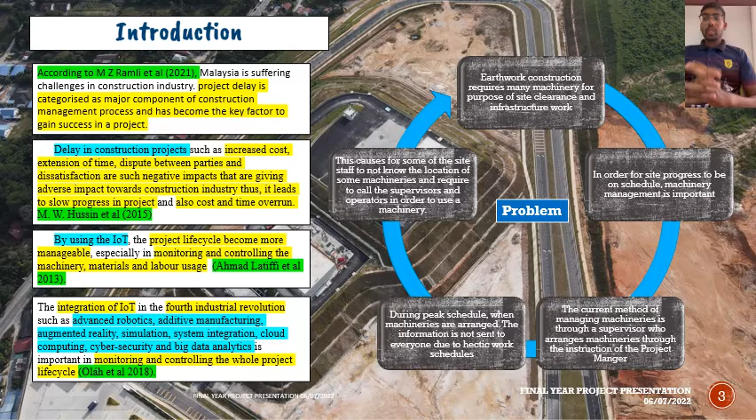The current method of managing machineries is through a supervisor who arranges them through the instruction of the project manager. During peak work schedule, when machineries are arranged, the information is not sent to everyone due to a hectic work schedule, as everyone is busy with their own work.

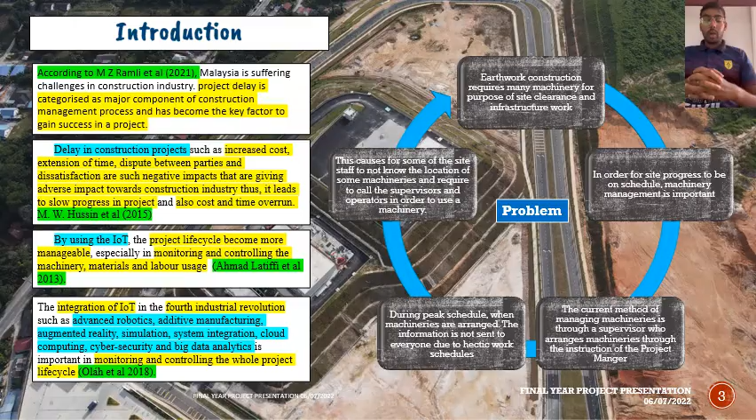Next, I'll be speaking about the problem statement. I have identified 3 previous researches somewhat similar to machinery tracking, but not the same.

The 3 researchers that I found use RFID technique, mobile computing device and wireless technology, as well as Internet of Things, to track items of their choice.

What I found is that the issue with RFID trackers is that they use a certain form of sensors, which provide issues as time passes due to wear and tear. To install sensors in heavy machinery such as trucks, excavators and bulldozers, the sensors are definitely subject to wear and tear due to the sophistication of the device and the way they work.

Next is real-time tracking. In one of the previous studies by Amine, they used real-time tracking to track construction work progress. This real-time tracking solution is dependent on GPS positioning, which does not work or function steadily during bad weather conditions.

Even our normal phone line is somewhat similar - we don't get good reception when the weather is bad, so the same concept applies here. In my application, I provide the location of machineries based on a site layout. I do not do real-time tracking or use sensors, and I also provide details of the operators.

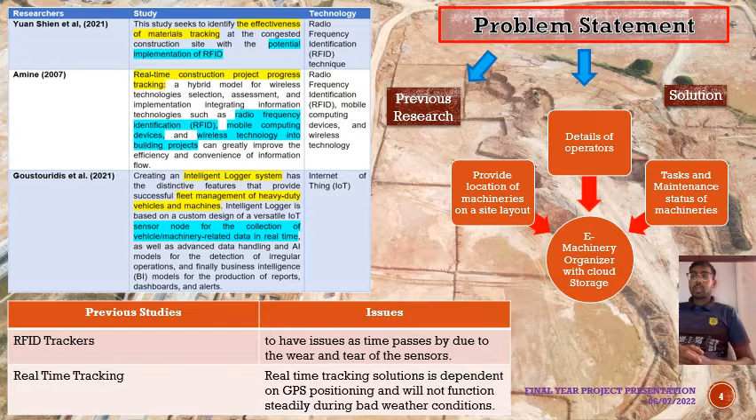Moving on, I'll speak about the objectives of my project. The first objective is to design an e-machinery organizer application to improve machinery management at the construction site in accordance with IR 4.0. The second objective is to develop the e-machinery organizer application using Adalo application developer. The third objective is to test the effectiveness of the e-machinery organizer in the construction site.

Furthermore, I'll speak on the scope of the project. The scope of this research is limited to the construction site area of Kota Elmina Business Park. This application will allow project managers, site engineers and site supervisors to manage the machineries at the project site.

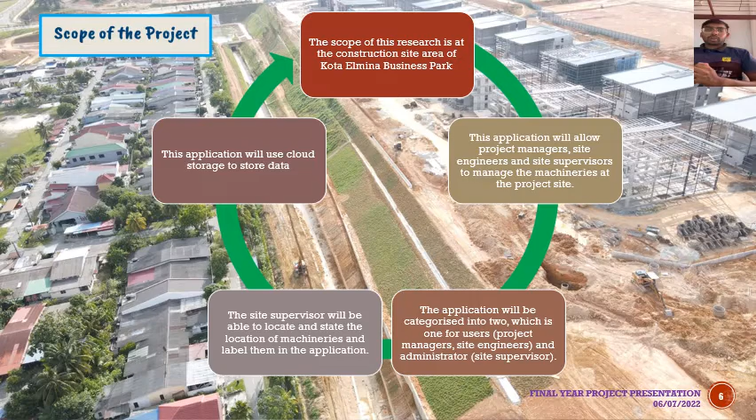The application will be categorized into two: the user interface for project managers and site engineers, and also the administrator interface. The site supervisor will be able to locate and state the location of machineries and label them in the application. This application will use cloud storage such as Google Drive to store data.

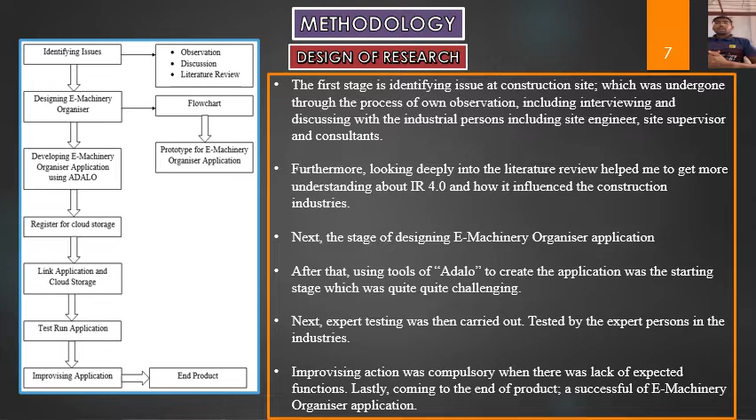Next I'll speak about methodology. Under methodology, I'll first speak about the development of research. The research is divided into two phases. My application is divided into two phases, which are the administrative interface and the user interface.

The administrative interface allows the admin to make changes to the app, and the user is only allowed to see the changes to the app. It begins with the main screen, which is divided into the administrator and user login, for security reasons.

Moving on, in the administrator interface, the admin will be able to edit machinery location, operator details and tasks according to the daily needs at the site. Machineries are labeled according to different symbols and colors in the site layout, and when clicked, it will display the operator details.

The edit screen will enable the administrator to edit all the details regarding operators and tasks at the related location in the site. The edit location interface enables the administrator to also move the location of the machinery according to the needs at the site.

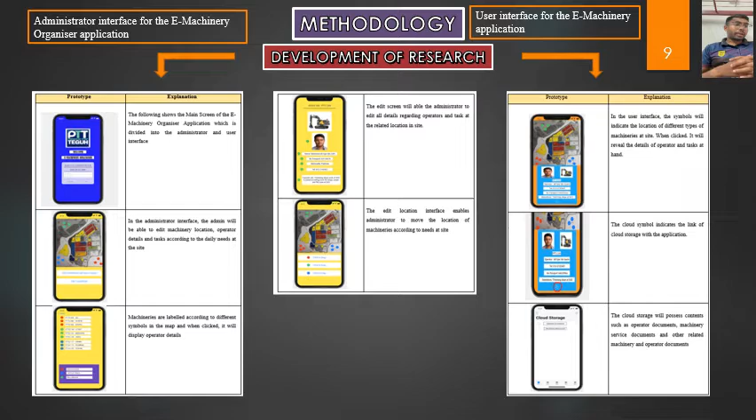The data collected was from the pre-final year project questionnaire and the post-final year project questionnaire. In the pre-FYP questionnaire, we analyzed the respondents' view on the existing method to monitor machinery at the construction site, and the post-FYP questionnaire is to analyze the effectiveness of the e-machinery organizer application that was created by me.

Moving on, I'll be speaking about data analysis. Firstly is respondent background. The respondent background was completed by employees of Pembinaan Tetap Teguh Sendirian Berhad, Khairi Consultant Sendirian Berhad, and also Saim Dabi Properties. A total of 30 respondents comprising 19 males and 11 females.

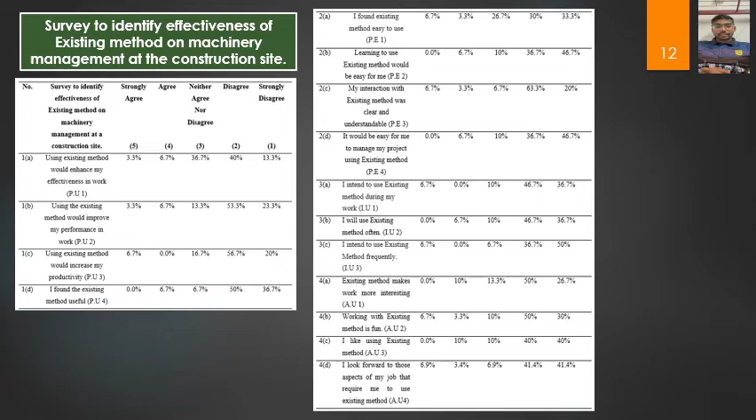This slide provides evidence from the survey conducted to identify effectiveness of the existing method on machinery management at the construction site. The pre-FYP questionnaire consisted of questions regarding the respondents' acceptance towards the old conventional method of machinery management. From the data, it can be seen that the majority of respondents feel that the current conventional method is not suitable. Majority indicate a scale of 3.0 and below, more than 50% agree that the existing method was ineffective. This proves that the current conventional method is not useful and there is a dire need for a solution to be brought in.

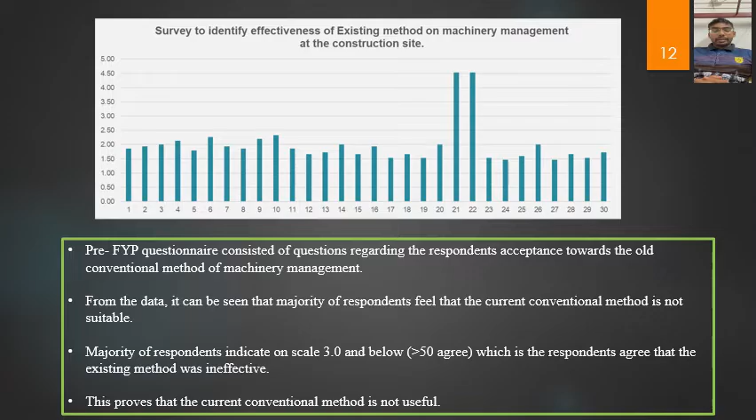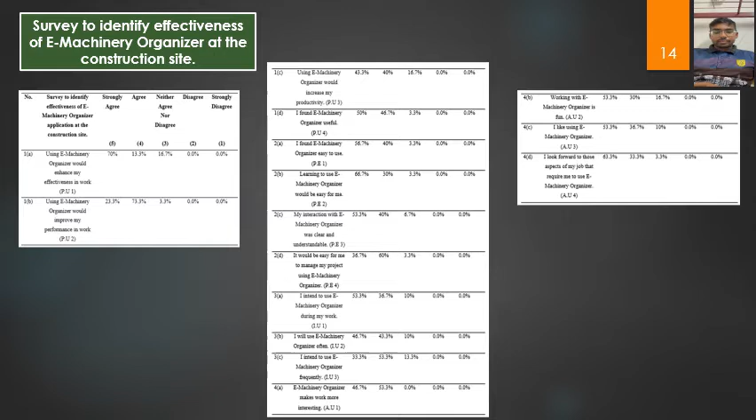Next is the data from the survey to identify the effectiveness of the e-machinery organizer at the construction site. The post-FYP questionnaire consisted of questions regarding the respondents' acceptance towards the e-machinery organizer. From the data, it can be seen that the majority of respondents feel that using the e-machinery organizer is suitable. Majority indicate a scale of 3.5 and above, more than 50% agree that the e-machinery organizer was effective. This proves that using the e-machinery organizer at the construction site is useful.

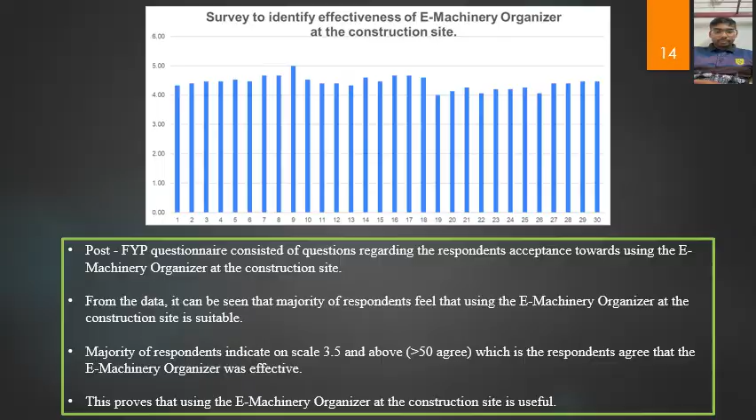Finally, a paired sample t-test was used to identify the difference to be significant for all variables being measured. The value of t for perceived ease of use is 12.73 and the value of p is less than 0.00001, significant at p less than 0.05. The value of t for perceived usefulness is 15.99. The value of t for attitude toward using the technology is 13.53, and the value of t for behavior intention to use is 16.15. All these results are significant at p less than 0.05. This suggests that using the e-machinery organizer was much easier and more resourceful compared with the existing method, meaning it was more effective.

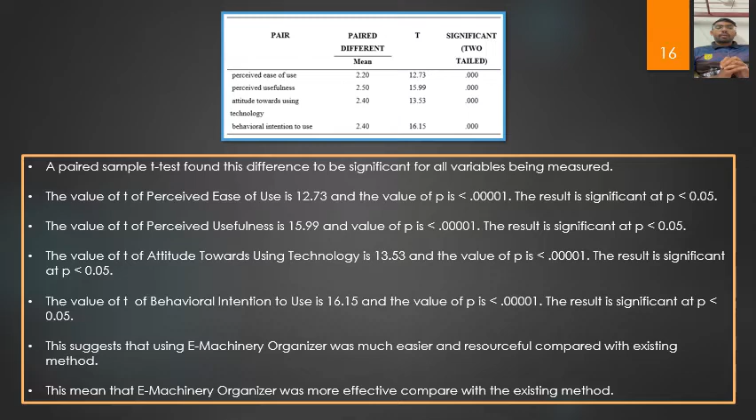Following is the project cost estimation. The total amount of this project was about 124 ringgit, with the Adalo application coming in free, and the banner and thesis totaling 124 ringgit.

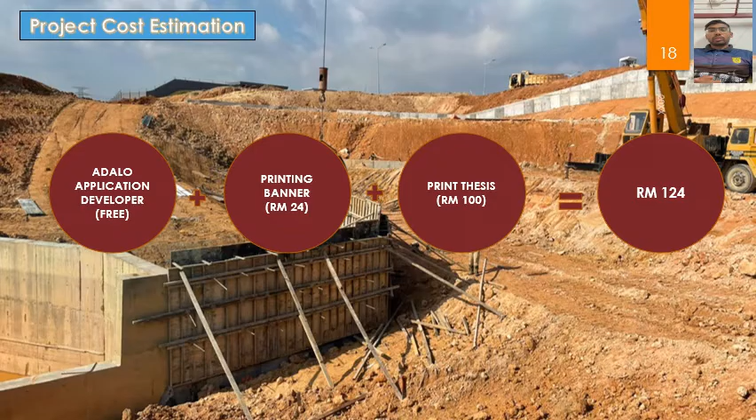In conclusion, it is possible to say that the respondents have problems in managing machinery at the construction site. The respondents have also agreed that all of the issues pertaining to machinery management at the construction site can be solved by using the e-machinery organizer with cloud storage. This project was proposed for use at Kota Elmina Business Park in Sungai Buloh because of the various machineries that had to be managed in the project. The effectiveness of this project was tested using the paired t-test method by Social Science Statistics, and all of the objectives of this project were achieved.

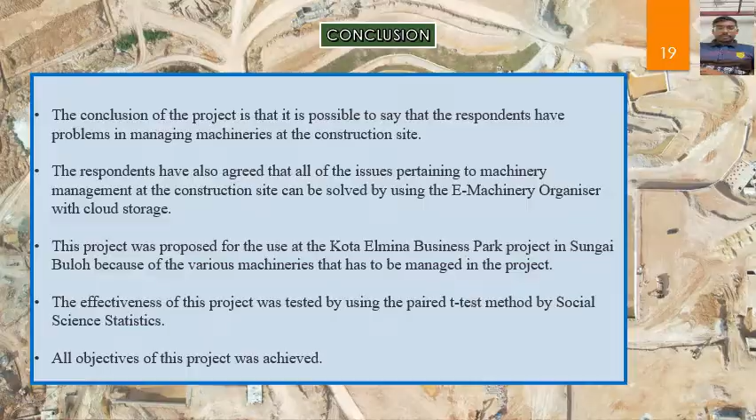Next is the originality, innovation and solution of the project. In the conventional method, supervisors need to be present in order to locate the machinery. Planning does not include the whole project team. Machine operator details are not available to everyone, and there is no notification in the event of machinery breakdown.

So what are the benefits of the e-machinery organizer? In the absence of a supervisor, machinery can be arranged through the application. Planning of machinery can be known by all. Machine operator details and location are present in the application, and machinery notification, details of breakdown and target repair date can be obtained from this application.

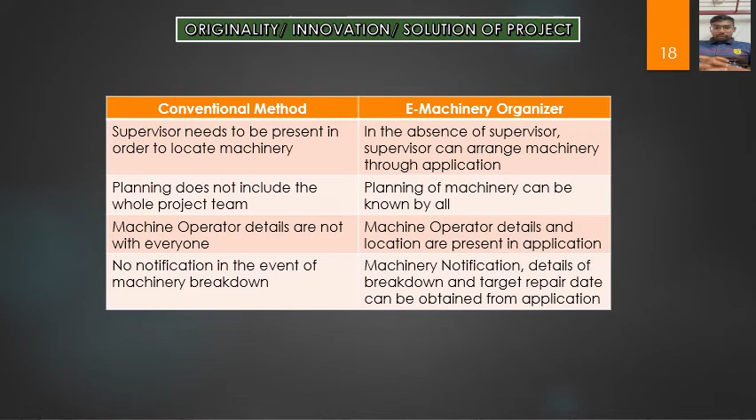Finally, moving on to recommendations, it will be much useful to many parties if the application can cover various other projects carried out by the company. Currently, this application is used by the project department to manage machineries at the construction site. Other departments such as QA/QC, admin, procurement and quantity surveyor can use this application to store their documents through cloud storage. The application can be created using other software such as Google Flutter, Jira, MIT App Inventor and Unity 3D. Users can create the application using the platforms mentioned above.

The current scope of this project is Kota Elmina Business Park. Therefore, it will be much useful to many parties if the application can cover various other projects carried out by the company.